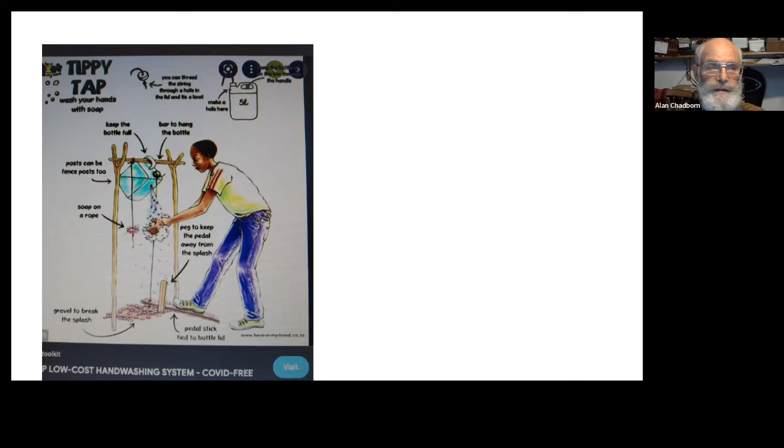Alternatives to that are to have a can or a bottle. There's different ways of doing it. Perhaps you can see from that picture. You can fill it up with a jug. You can have holes in the bottom like that, again with the soap tied on a string so that it's available without having to pick it up. Clear bottles, different ways of doing it.

CED has been in the business of providing water in many different places, and CED's water is clean and filtered by Nigel's wonderful filters, of which we've heard in the other tech talks. But no matter how clean the water is coming from the village tap, if your pot is dirty, then infection gets in. So we need to make sure that the pots are kept clean, especially if they're unglazed.

I couldn't resist putting in a picture of this man that we saw carrying pots for sale about 20 miles to market every week. That's a wonderful bicycle load.

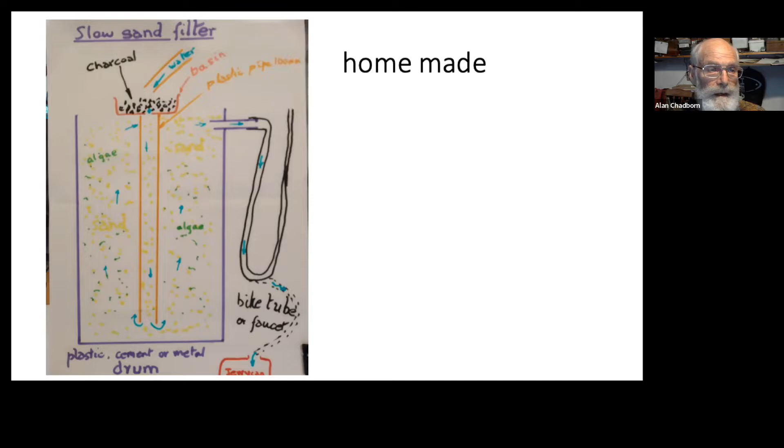Now it becomes personal cleanliness. Apart from hand washing, the whole body needs to be washed, especially after you've been working in the garden all morning. But women may have to remain dirty until darkness comes, so they can wash in behind the hut. But if they have a bathing shelter, then they can wash as soon as they finish the morning's work. And if the soil in the shelter is sandy or well drained, then the bathing shelter may be used for urinating. This is the common practice in northeast Uganda.

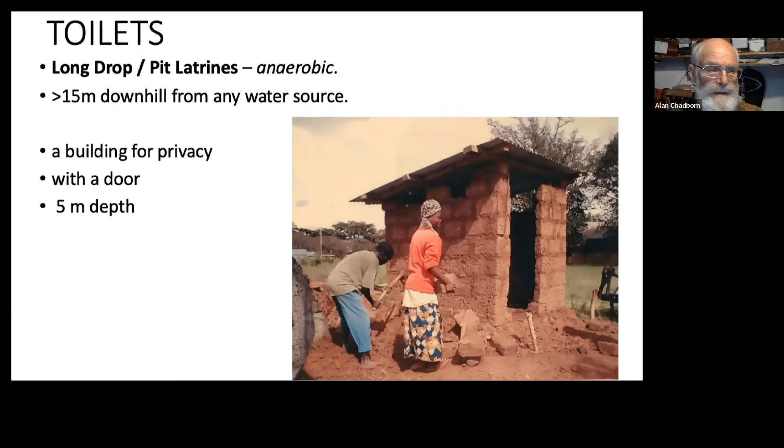Now, there's something called the Ventilated Improved Pit Latrine, which was developed by Morgan in Zimbabwe. This is made with a spiral wall and doesn't need a door. However, if animals are a problem, it may be good to have at least a half door.

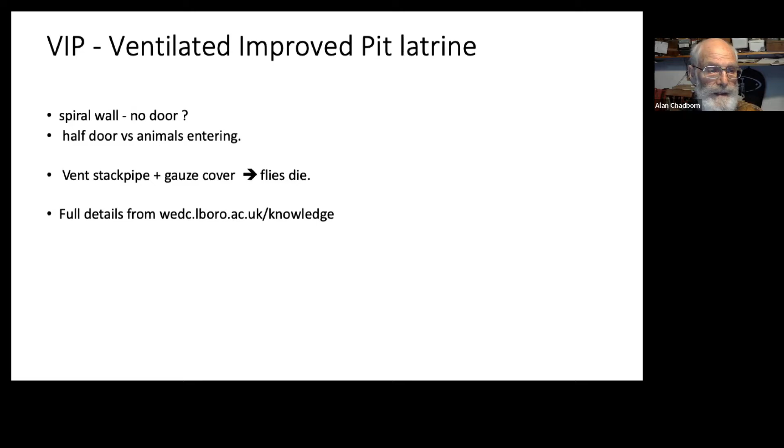An essential part of it is that it has a vent stack pipe, and that stack pipe has a gauze cover so that the flies die. Full details are there from Loughborough University. And here's a picture. So here's the hut for privacy.

And here's the pit. The flies may come in with the air and they may hatch in here, but they always go for the light. So the light is at the top of the vent stack, and when they get there, there's a gauze and they can't get out. So they buzz around there till they run out of energy and then they fall down and die. So that deals with the flies, but it also ventilates the house so that the smells go up the vent pipe.

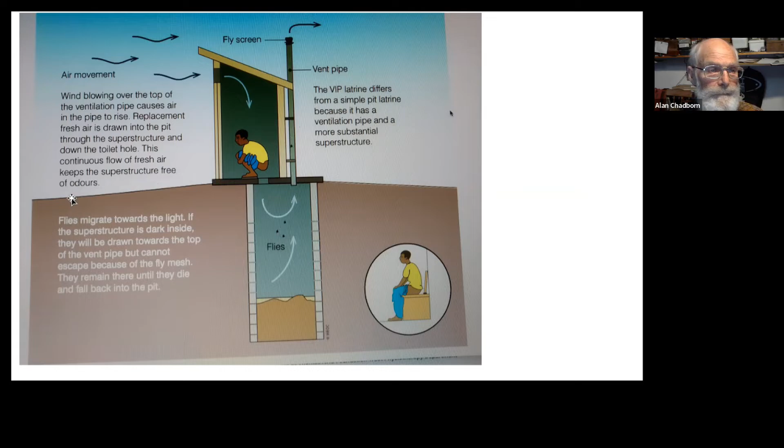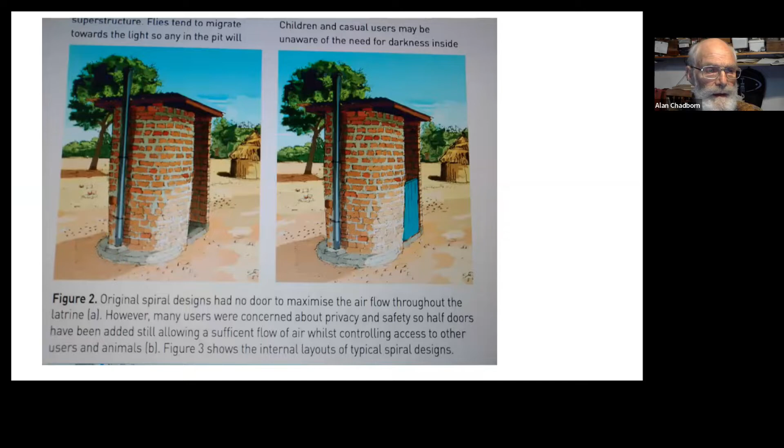But the disadvantage is if there's a high water table, the dung floats. And I can tell you from experience that when you squat there and you see the dung floating about a foot below where you're squatting, it doesn't feel very comfortable. If there's underlying rock, you can't dig deep enough. If it's very sandy soil, it may collapse on the person digging it.

There was a case where the police had got a prisoner to dig a pit latrine, and in the process it collapsed and they couldn't dig fast enough to save him. So it needs shoring up with boards or being lined with bricks or blocks, which of course makes it more expensive. If there's a well nearby, as we've said, we need to make sure that it's downstream, downhill.

Now, if there's too many people using the pit latrine and it's filling up too fast, more than the rate of decomposition, then you may need a vacuum tanker to empty it, and that's expensive. And as with any anaerobic decomposition, there's an offensive smell.

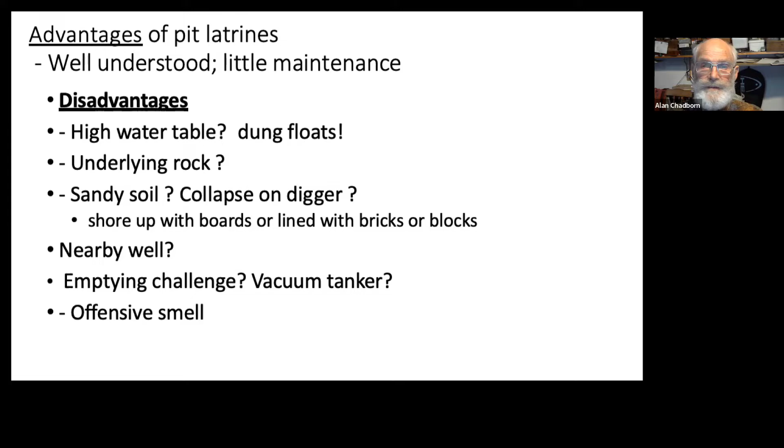If it's difficult to dig deep enough, then a short drop pit latrine may be a good idea. In that case, there's two pits, and when the first one is full, you move the hut over to the second one, and meanwhile this is decomposing or drying, and it may be dug out, or it may be that will be sufficient and you can just put the hut back onto the other one, or you can dig it out and put it on the compost heap.

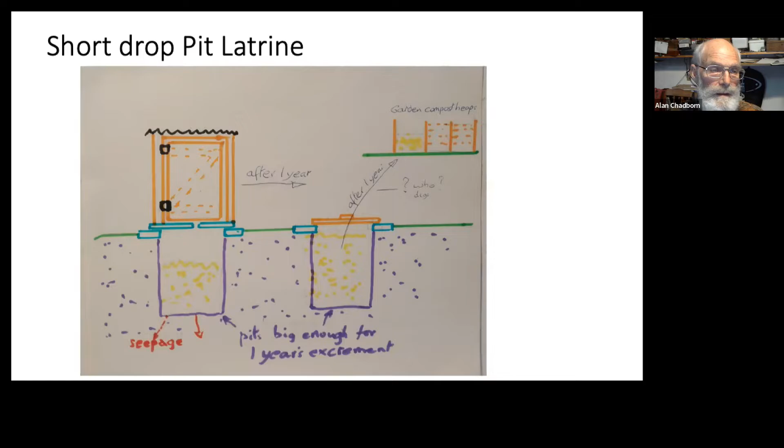Pour flush is another idea for eliminating flies, because, as with any normal flushing latrine or toilet, the water trap prevents any smells or flies coming up. Now, obviously there's more water going down than just urine, so there has to be a good seepage rate so that it doesn't fill up. So that depends on the underlying soil and subsoil.

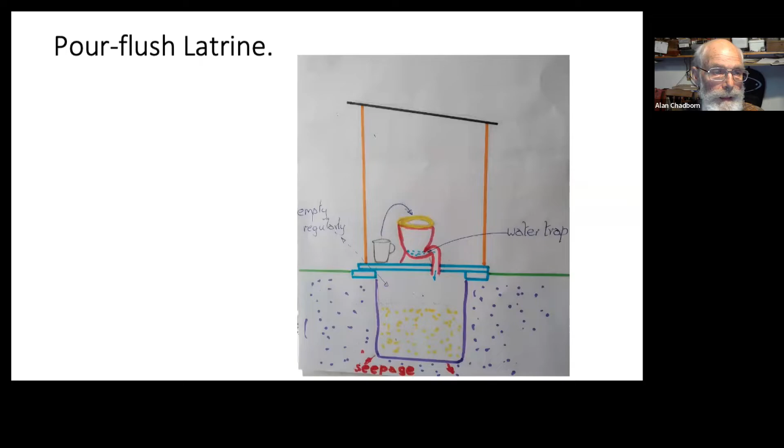On the other hand, there's composting toilets, which depend on aerobic decomposition. And the main thing here is not to drown them. They don't like it, and they'll give over to the smelly anaerobic ones. So in order to reduce moisture going into your composting latrine, I'm afraid this is just a picture. Imagine that's the squatting hole. If there's any spillage on the floor, get some ash from the cooking fire and sweep the ash and the urine or the other dung into the pit. No water.

To help the bacteria, add kitchen waste, potato peelings, outside cabbage leaves, that sort of thing. Also add a bundle of grass every week, and that will fuel the bacteria. They'll work harder, get hotter, and that will eliminate the pathogens.

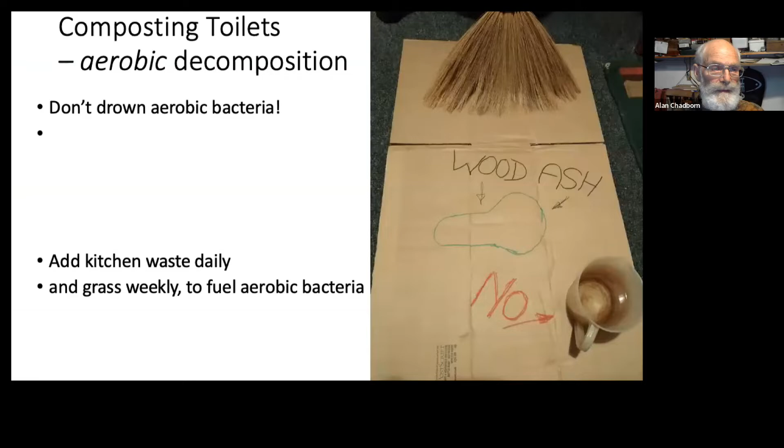Again, to reduce moisture, you have a gutter. So this is a cross section of the slab. Here's the squatting hole. The person is standing facing that way. The urine goes into the gutter and the feces go straight down.

The gutter leads to a can, maybe a jerry can. And when that begins to fill up, you pour it into a garden compost heap. And the ammonium compounds, the nitrogen from there, will feed the bacteria and help the decomposition in the compost pit and eventually produce better crops.

One form of composting latrine is the alternate fixed pit. Fancy name there, Fossa Alterna. So you've got one pit here, and when that's full up, maybe after a year, you transfer the hut over to the other one and use that one. At the end of the second year, you can dig out this compost, which will have rotted down beautifully by then, and you put it on the garden.

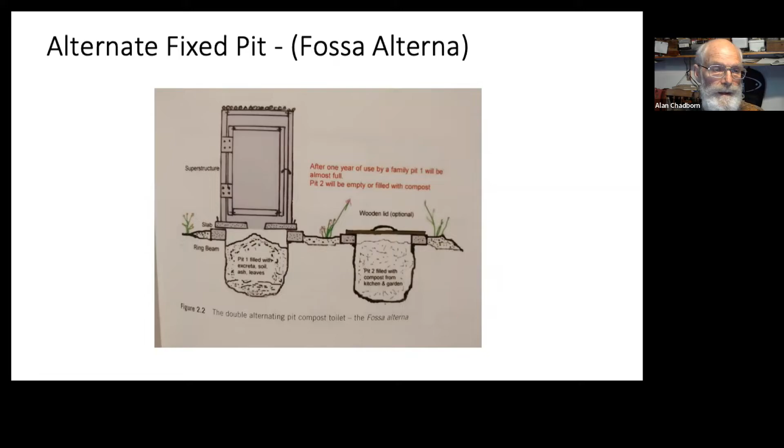Here's my example of this. I read a book called Sanitation Without Water and developed my design from there. So here's the two pits, covers on each pit. The pits are about 30 centimeters below ground level. That's all. It's got a reinforced cement floor and it's got two squatting holes.

So your first year with this one, put a block in that one and use the second for a year. At the end of the second year, empty the first one with a wheelbarrow. I used to get about 9 wheelbarrows full out every year. Mind you, we had a good number of visitors who all contribute.

I was experimenting with making donkey carts and ox carts out of local branches without buying or making sawn timber. But that's by the by.

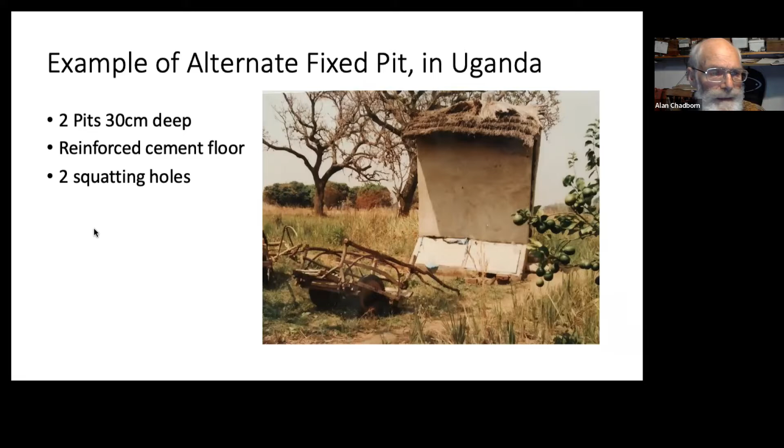When we came to make the second version of this Fossa Alterna, instead of buying reinforcing bar, which I felt villagers would find difficult, we made parabolic arches. As you can see, the regular size of block was really too big. It was a bit clumsy. So after that, we made them with smaller blocks, and that worked better. So the parabolic arch is strong enough by itself to support the floor, and then you build your hut on top of that.

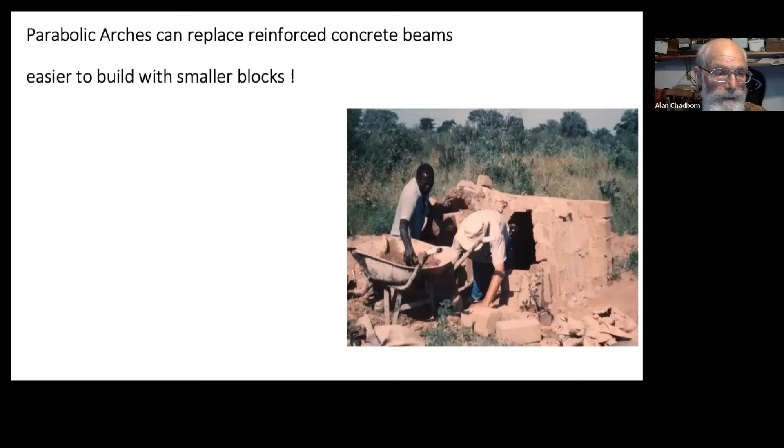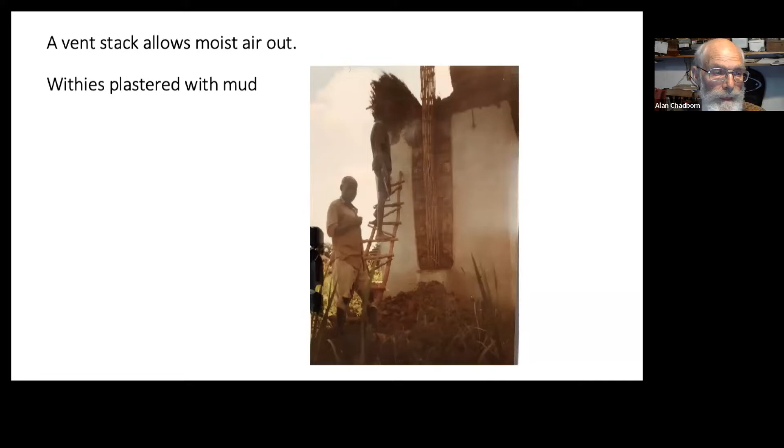Here's the back of a hut, and the vent pipe is made by using locally grown withies and then covering them with mud. And that dries hard, and you've got a good pipe without having to buy plastic pipe. Here's the other side of it, a light wooden door, steps up, and here you can see the covers on the two pits.

The alternate fixed pit that we've just looked at works very well, but some people may be reluctant to handle what they consider is still human waste. In actual fact, I found only eggshells and mango stones survived. All the rest was completely rotted and just looked like friable soil. But it's a cultural thing, so we may need an alternative.

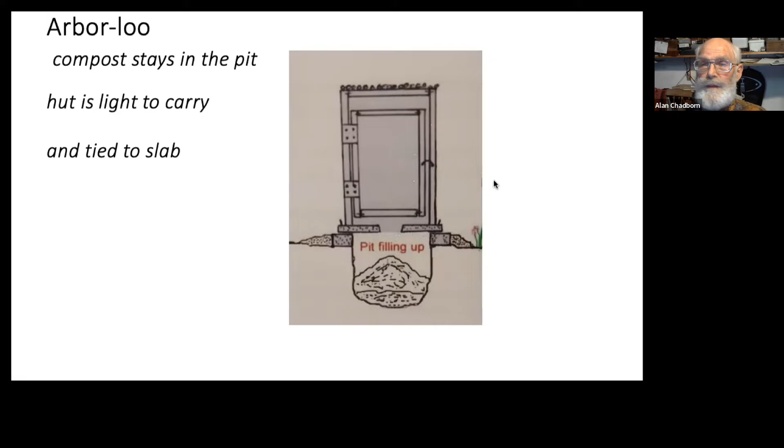And the Arborloo, again, developed by Morgan in Zimbabwe. This one, the compost stays in the pit. The hut, the shelter is very light and is attached to the slab. So the pit fills up and when it's filled up, you move the whole thing to the next place. So here's a picture to illustrate that. Here's the pit filling up. There's a new pit provided.

Again, each pit has a ring beam round it made of bricks, and the slab is put on top of that. When the slab is made, it's made with holes with straps or bits of rope as handles, so that 4 people can lift the whole thing in one go and put it on the new place. After moving the hut and allowing the compost to finish its decomposition and cool down, then you can plant a tree. And the tree will say, "Thank you very much, I've got food for life."

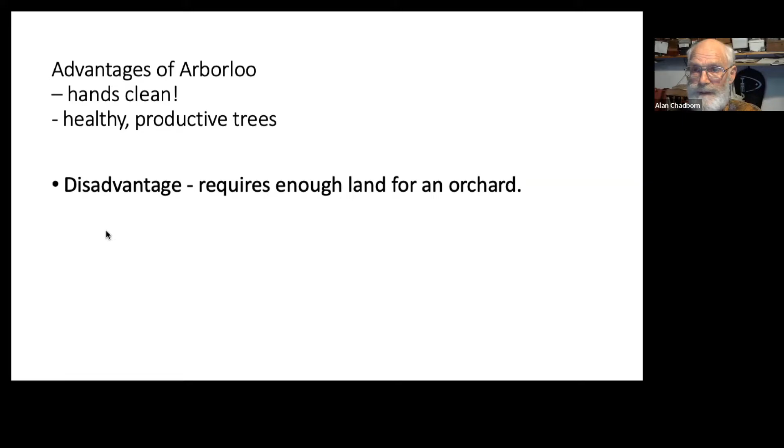And that's a wonderful solution if you've got enough land. So your hands are clean, you get healthy, productive trees, but you need enough land for an orchard. And your orchard can be bananas or fruit trees or trees for firewood.

But when it comes to large institutions, schools or prisons, a composting toilet of the type we've just been looking at is not really good enough, because the volume would overwhelm and management would be a challenge. Who would look after it? Who would sweep it? Who would put in the kitchen waste and so forth?

So in some countries, toilets are connected to biogas digesters, and that's a wonderful solution. It's called Gobar gas in India. And they've built 1.2 million. So there's plenty of examples, and I expect people could look them up on the websites. Also in Zambia, Kenya, Ethiopia. So that's obviously a working solution.

Another solution has been developed by Joseph Jenkins of USA, and he calls it humanure. So inside the hut, there's a seat and a reasonably large container in which to do your business.

And there's a box with sawdust or chopped grass, chaff, which everybody is asked to put on top as soon as they've finished. And then there's a monitor, somebody appointed who's agreed to do the job of taking out the bucket and emptying it into the compost heap on a daily basis.

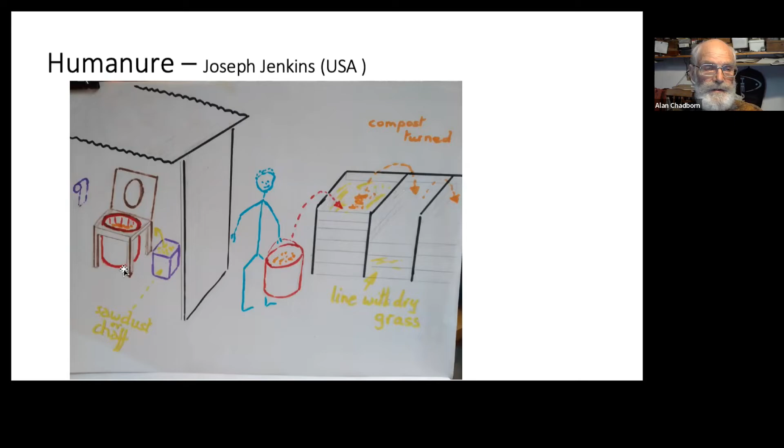So it's for institutions. Monitors need to be appointed. It needs a large throughput, and the rapid temperature rise kills the pathogens. Low on capital, and it gives compost for the gardens, but you have to have people who agree to do the job.

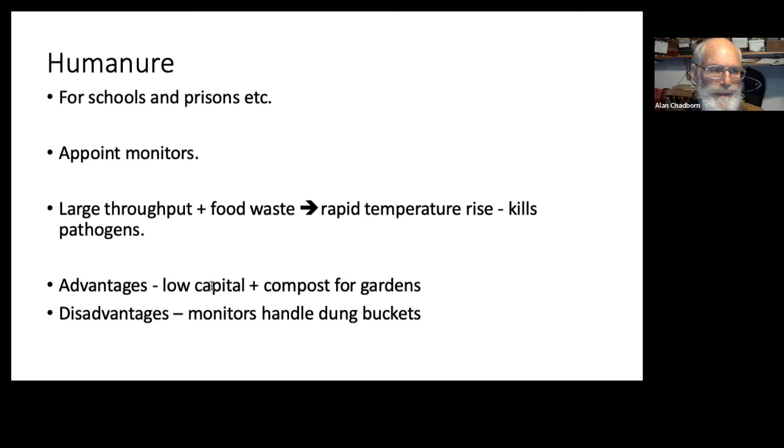Of course, there's manufactured versions of composting toilets made out of varieties of plastic, and you can look them up on the web and buy them if you can afford them.

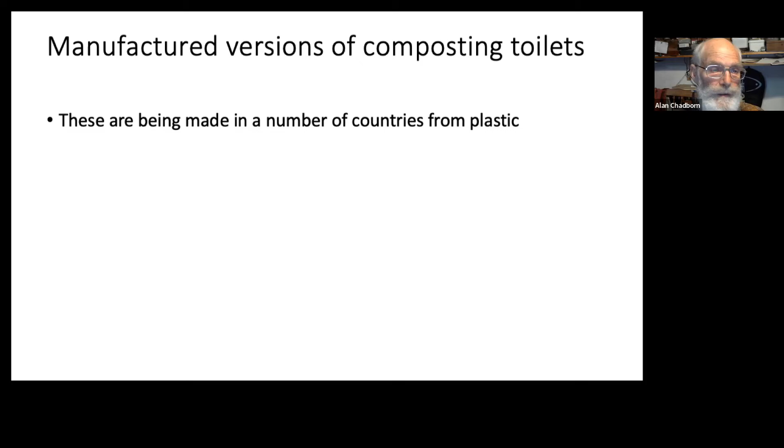Now, all of the latrines we've been talking about so far need floor slabs. The pit latrines need concrete slabs, and CED has been involved in training local women to make them. Generally women, and they can make a business out of it, selling slabs to their neighbours. So that's good for them.

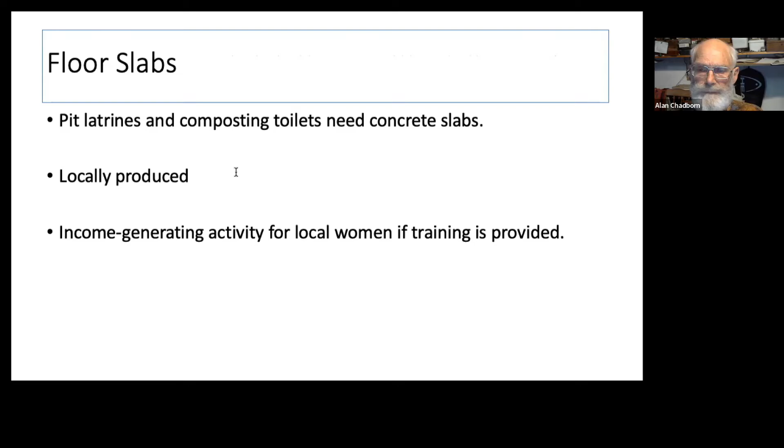Here's an idea for producing the slabs for the arborloo. It's a circular slab, and it's better if it's thicker in the middle. So you have a metal band, a piece of flat metal formed into a circle and welded, and then you provide two scrapers. If possible, have a post up the middle, and the scraper has a hole in the middle so that you can revolve it round to scrape the sand on the floor exactly level.

And then you pour your cement, you put your wooden plug in the shape of the squatting hole in the middle. You also put some pegs at places on the outside which will form holes. Come to that in a minute. And as you pour your cement and spread it out, you put in some wire as reinforcing. It only needs it on the outside, near the circumference, I should say.

And then once that's done, use the second scraper. It's made with a bevel, so that the slab is thicker in the center where people's weight is going to be. Once the cement has dried a bit, towards the afternoon, you can put on some wet sand to reduce the rate of drying. And that wet sand will be there to put the next one on the next day.

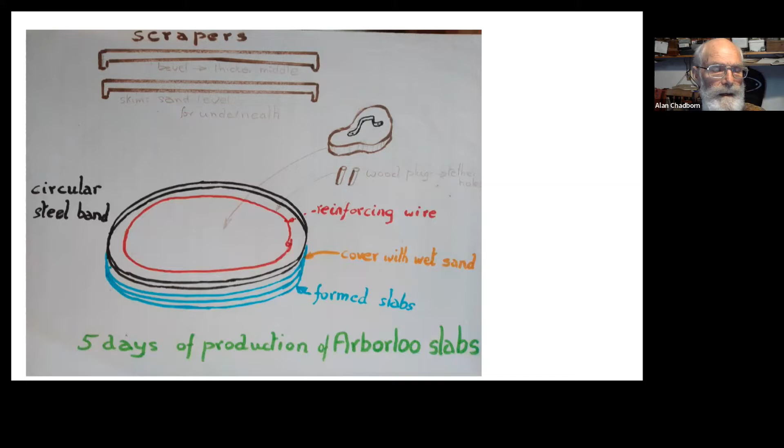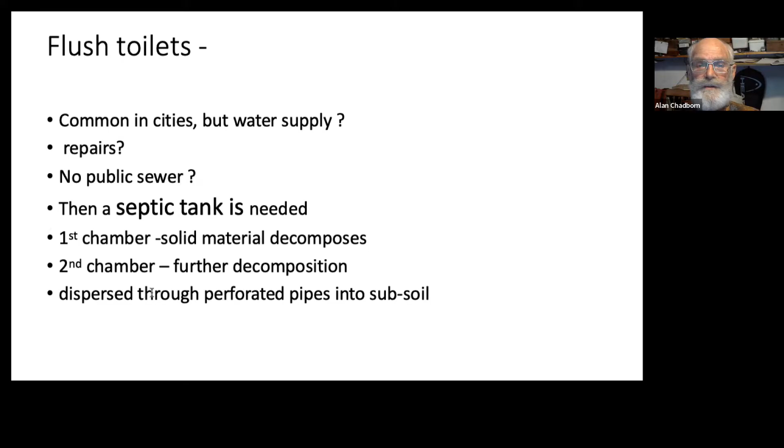If you do have a flush toilet, then, flush toilets are common in cities, but need a water supply, obviously. However, water supply isn't the only thing. They'll also need repairs. Who's going to do that? And they need a way of disposing of all the soil water. If there isn't a public sewer, then a septic tank is needed. This has 2 chambers and the effluent is dispersed through perforated pipes.

By this time, it's relatively clean, and it can go out to pipes which are laid in the soil, which are perforated, or if they're clay pipes, the liquid can disperse through the joints. So those would be laid out in a fan, perhaps across the land. That's quite an expensive bit of kit, but that's what's needed for flush toilets.

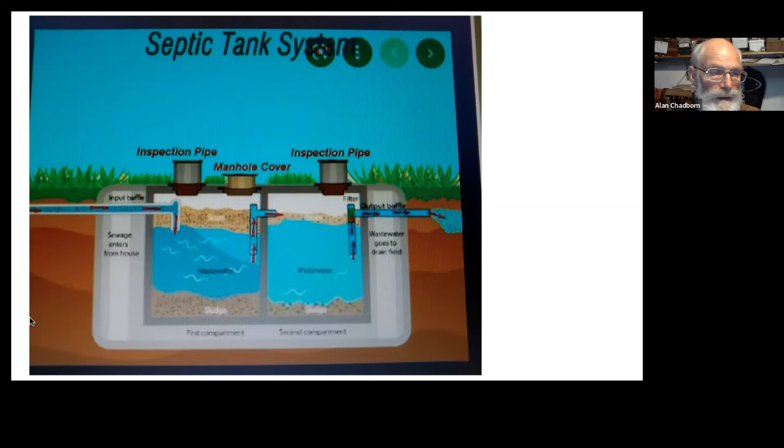So in summary, we can see that sanitation is not high tech, but it is a matter of changing habits. Habits are quite difficult to change, and it's best if the whole community does it together. So as we find in Africa, churches are very popular. People go to church, and if the church can be the agent of change, then the whole community will change together. So if the information can go to the leaders of the different churches in the village and teach all the congregations, then everybody can change together, and that's what we now do.

Deuteronomy chapter 23, verses 12 to 14, goes back thousands of years, but there's the basis of breaking the cycle of infection. People were asked to go outside the camp with something like a trowel so that they could bury their feces. It's a good start from a long time ago. So we've looked at different ways in which this can be done.